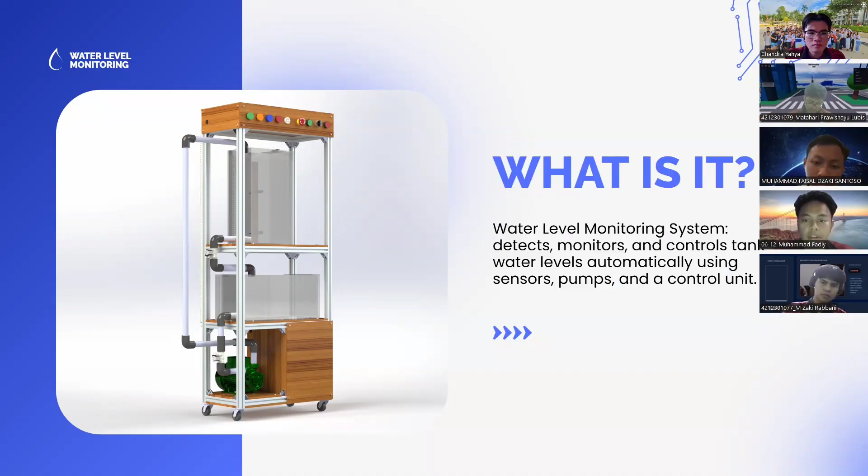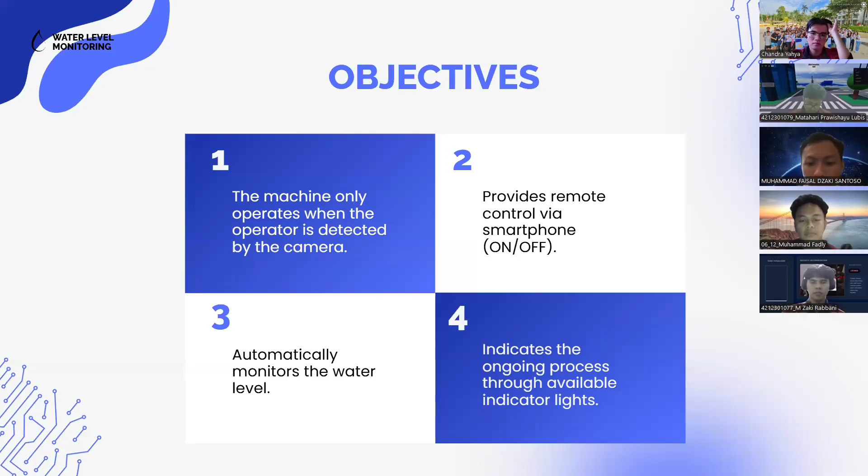Okay, what is it? Water level monitoring system functions to detect, monitor, and control tank water level automatically using sensor, pump, and a control unit. Objective: first, the machine only operates when the operator is detected by the camera. Second, provide remote control via smartphone, on or off. Third, automatically monitor the water level. Fourth, indicate the ongoing process through available indicators. Next.

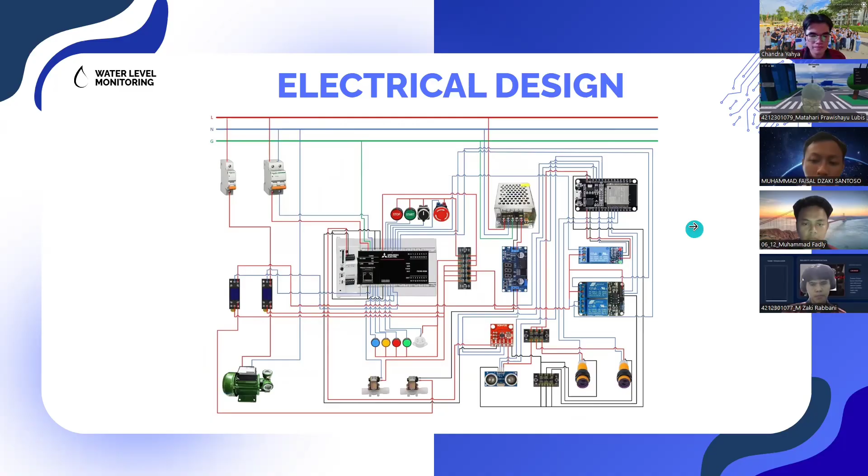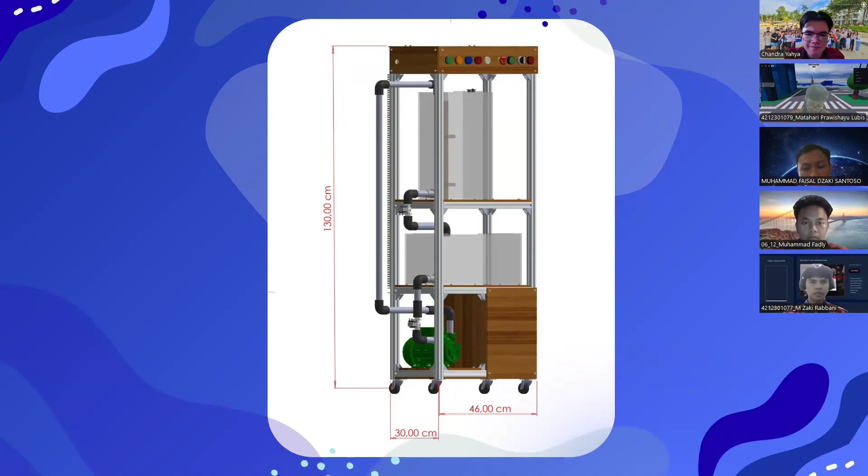So the machine is built from several main components. First, there are two water tanks placed at the upper and the middle part of the machine, and these tanks are used to store the water and observe the water level. There are also two solenoid valves installed on the pipes to control the water flow between tanks. And at the bottom part, there is a water pump. EFOS DB-125 is the type, and the water pump moves the water through the system and is placed at the bottom to help stable water flow.

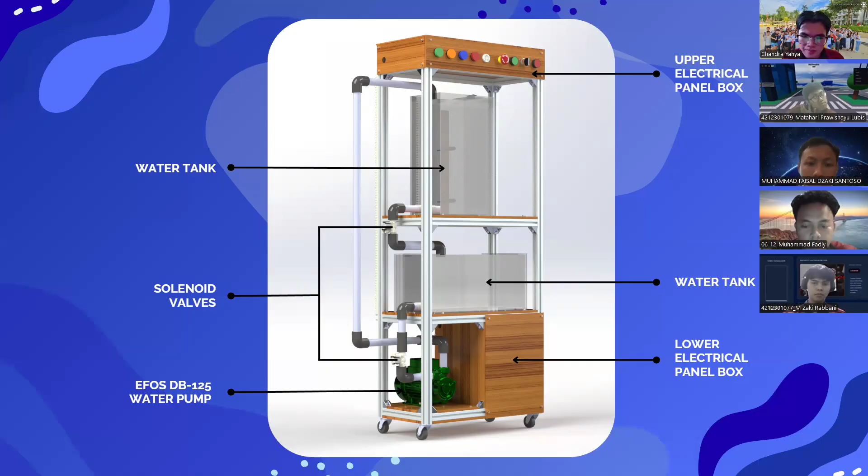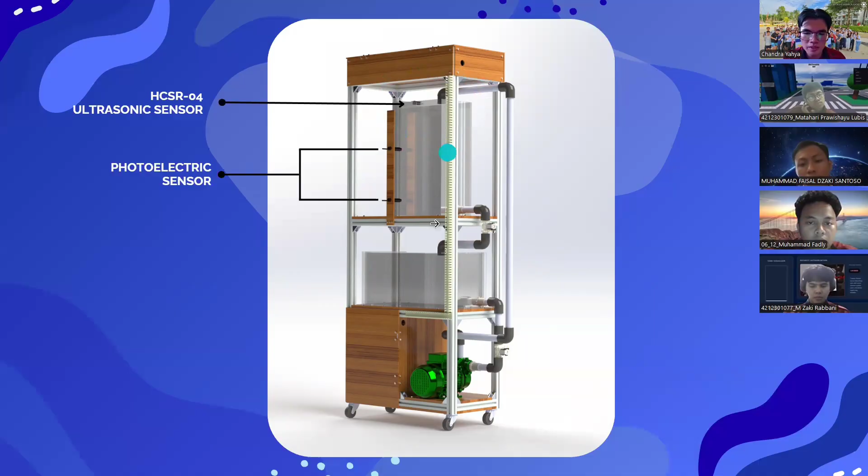The system also has two electrical panel boxes, at the top and at the bottom, and these boxes are used to protect the electrical components and keep them safe from the water. The system also includes two photoelectric sensors, which are used to detect water level positions, and one ultrasonic sensor. HCSR-04 is the type, which is used to measure the water distance or the water level inside the tank. Next.

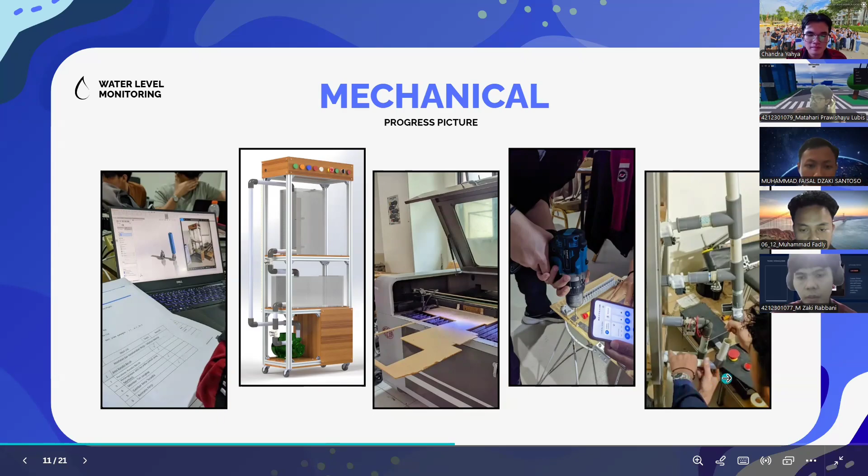And this is our progress picture. So first here is our mechanical progress picture. In the first photo, we're doing the mechanical design, and we design it using AutoCAD, and then we do the laser cutting for the panel, and after that we do the drilling for the panel, and then we're installing the pipe and installing the solenoid valve. Next.

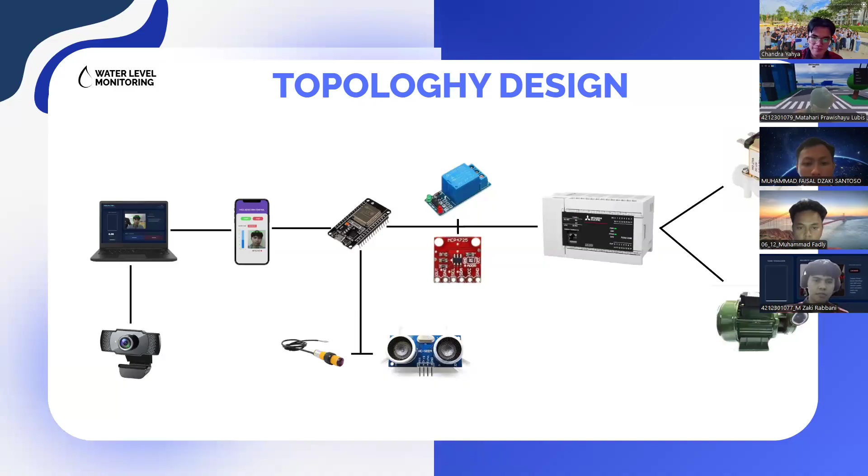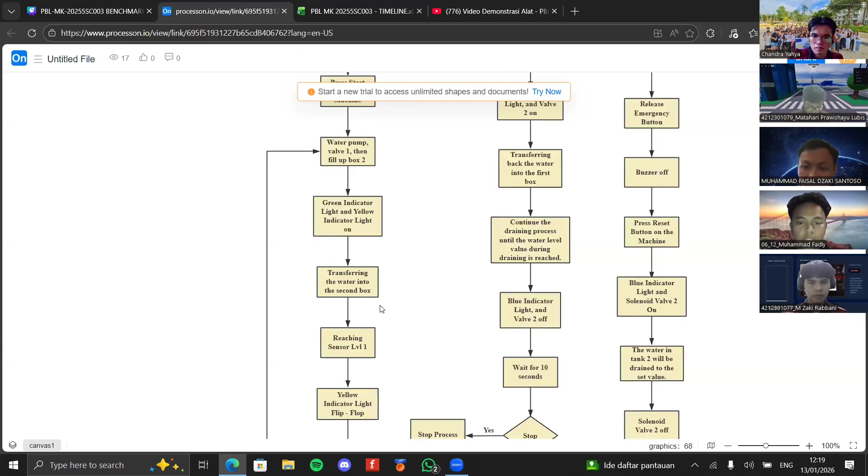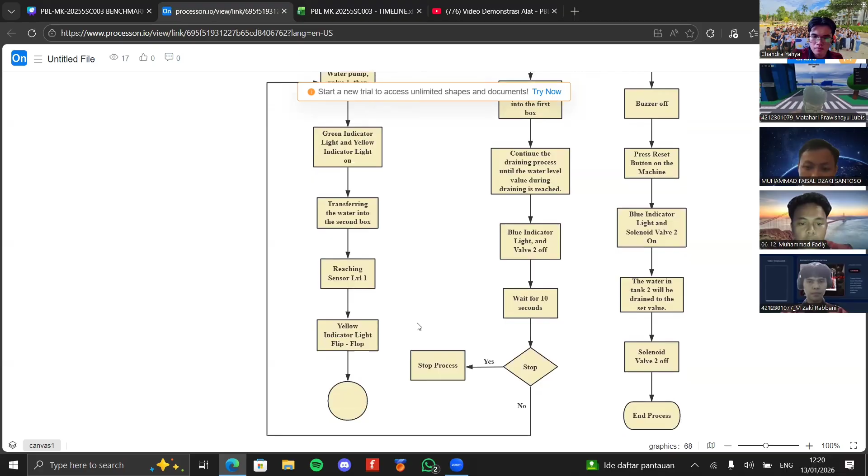Next is reaching sensor level 1. During water filling, the water volume will increase, and when sensor level 1 detects the water, the next process will begin. The next process is the yellow indicator light will flip-flop, which means that we must be careful because we have entered the medium level. After that, continue filling until sensor level 2 detects or until the water level value during filling is reached. Okay, so the purpose of this process is that the water filling will stop if sensor level 2 detects the water or if the water level during filling has reached the value we set at the beginning.

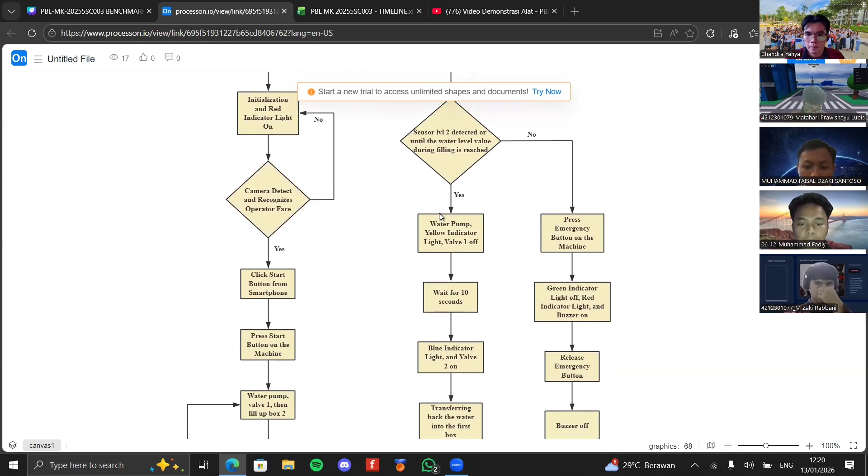After that, the water pump, yellow indicator light and solenoid valve 1 will be off. And after that, we can wait for 10 seconds to see and make sure whether the water level has reached the value we want earlier or not. After 10 seconds, the blue indicator light and solenoid valve 2 will be active. And after that, transferring back the water into the first box. And next, continue the draining process until the water level value during draining is reached.

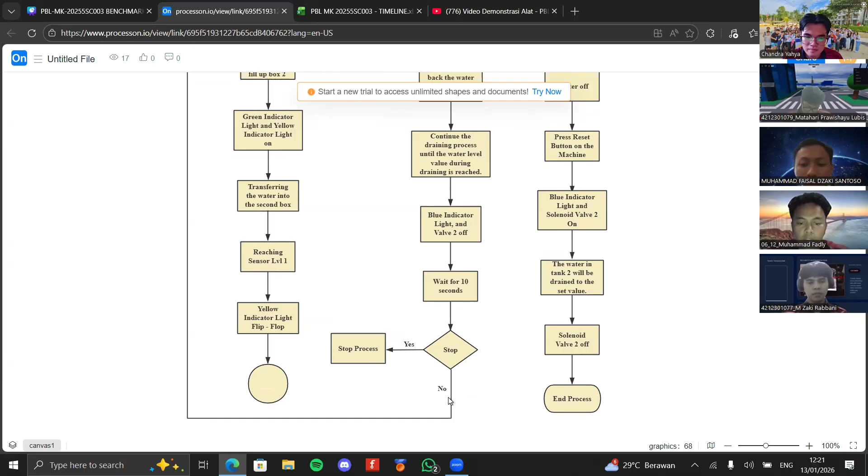Okay, after that the blue indicator light and solenoid valve 2 will be off, and we can wait for 10 seconds to see and make sure whether the water level has reached the value we set at the beginning. After that, we can press the stop button on the machine. If we press the stop button on the machine, the process will be stopped. And if we don't press the stop button on the machine, the process will continue and repeat back to the filling process like this.

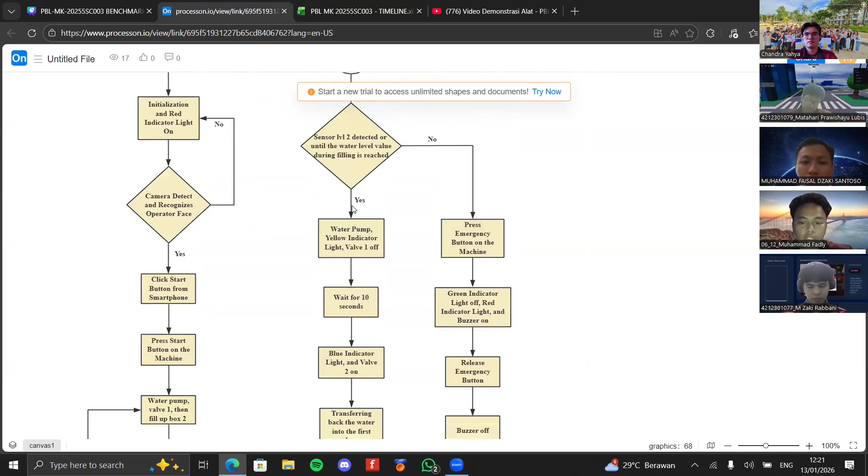And this is the condition that occurs if there is a problem. For example, a sensor that is damaged and cannot read the value. If the sensor cannot read the value, we need to press the emergency button on the machine. We don't need to press stop but press the emergency button on the machine. After that, the green indicator light will be turned off, and the red indicator light and the buzzer will be active. After that, we release the emergency button and the buzzer will be off.

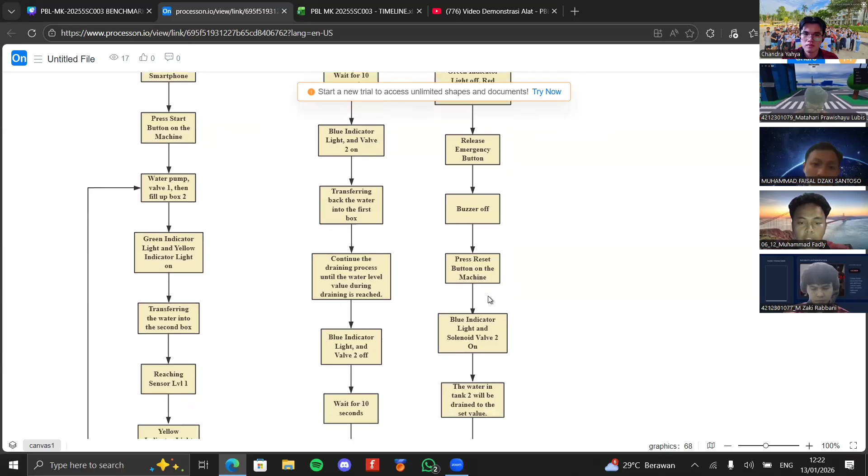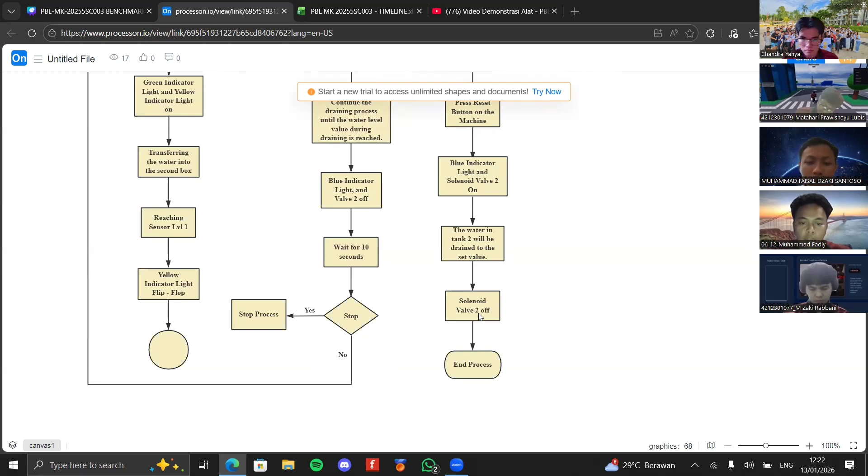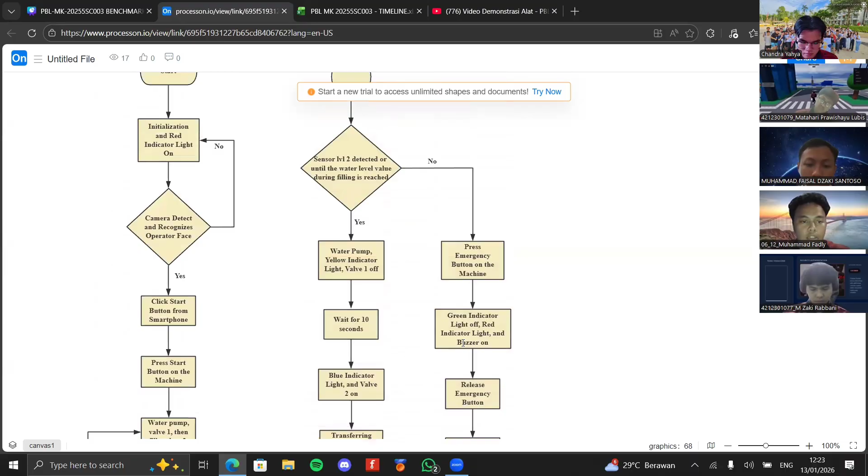We can press the reset button on the machine so the draining process will begin again. The blue indicator light and solenoid valve 2 will be active, and the water in the second box will be drained to the set value. After reaching the value we set, solenoid valve 2 will be off and the process will end. After that, if we turn on the machine again, we can go back to the first process. Okay, next is timeline.

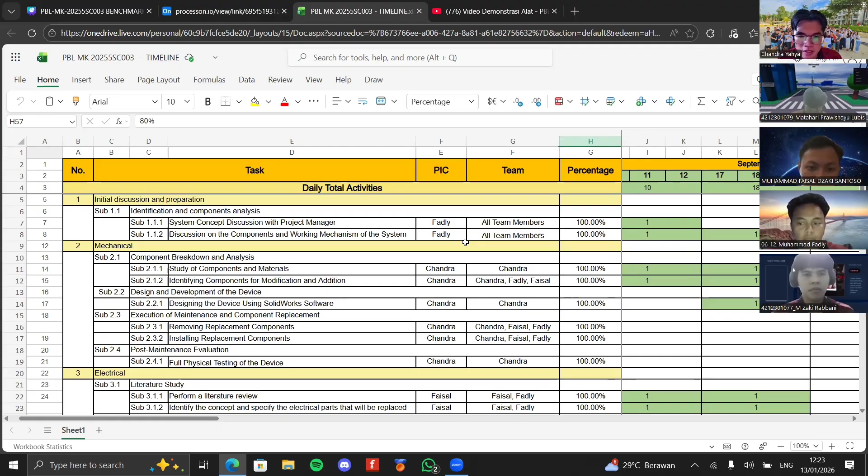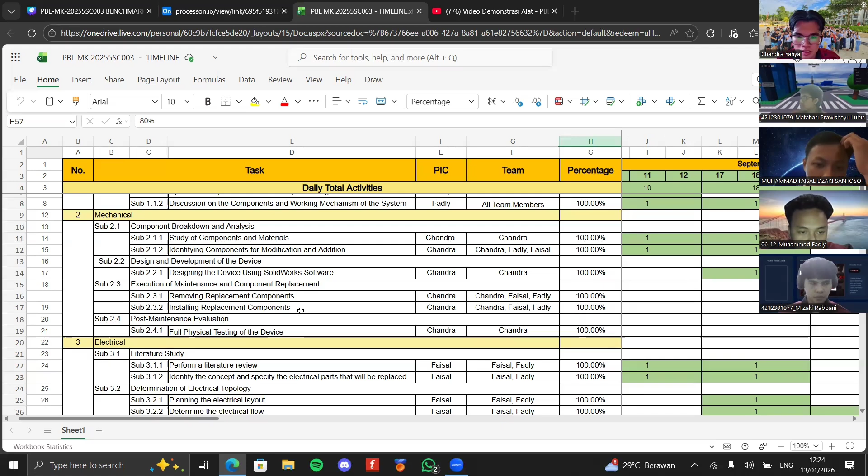The second stage is the mechanical design and development. This includes studying components and materials, designing the device using SolidWorks, replacing and installing the mechanical components, and performing the physical testing to ensure the mechanical system works properly. And this stage is also 100% completed.

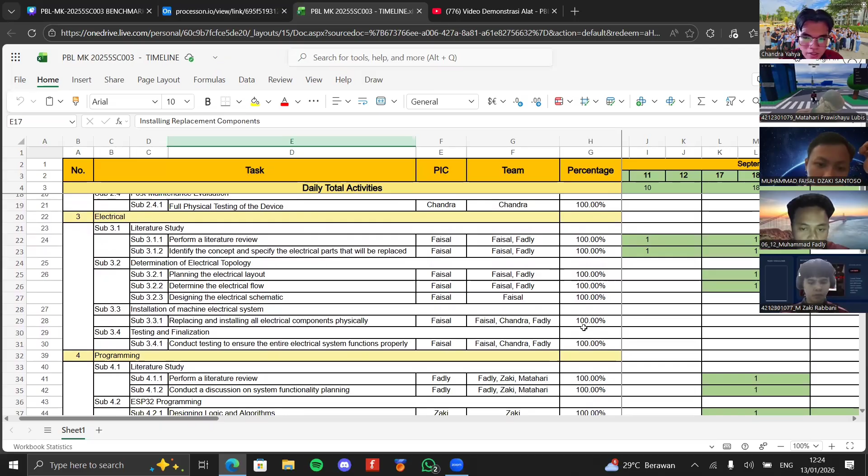Next is the electrical system development. The activities in this phase include the literature study, determining the electrical topology, designing the electrical schematic, installing the electrical components, and testing the electrical system. This stage is fully completed. The next stage is the programming. This phase involves the PLC programming, ESP32 programming, logic and algorithm, and the system testing to ensure proper operation.

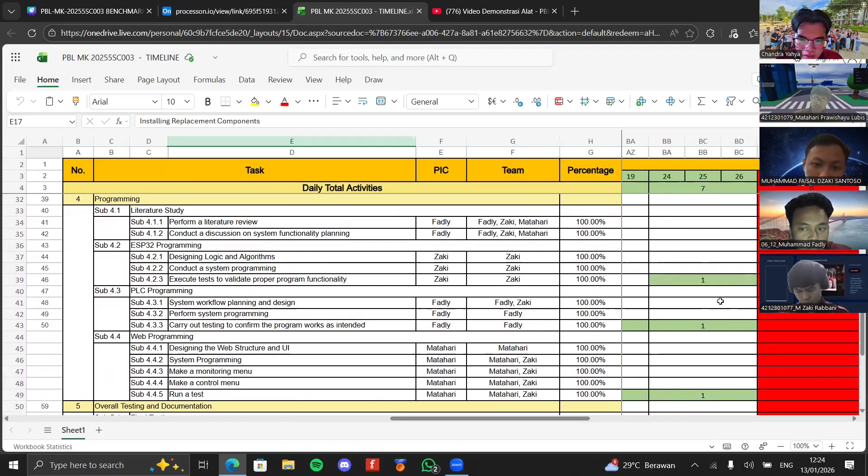And after that, the project also moved into web programming, where the team designed the web structure and the user interface, the UI, developed the monitoring and control menus, and tested the web-based design. These stages are also completed.

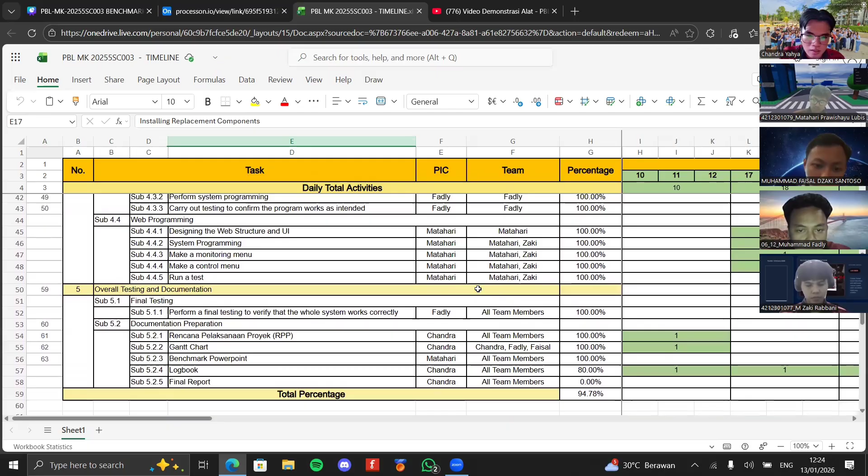The final stage is overall testing and documentation. In this phase, the entire system was tested together, the overall testing has been completed, and the system operates as expected. Currently, the only remaining work is the documentation stage, which includes final report preparation and logbook completion. These tasks are still in progress. Next,

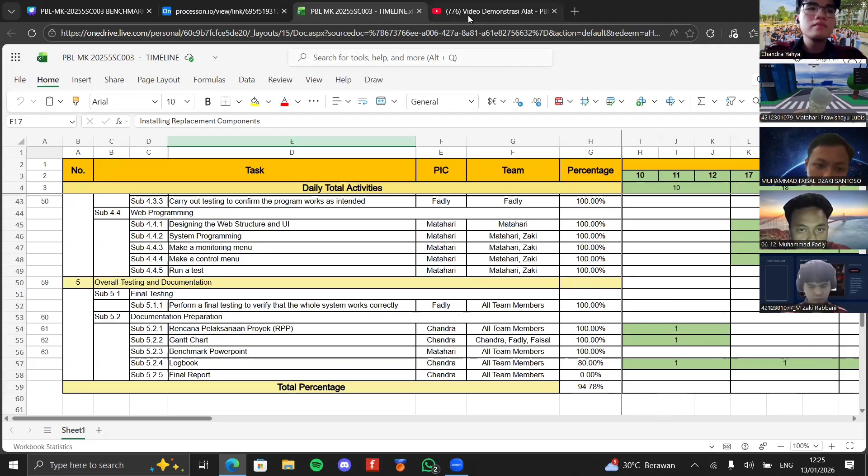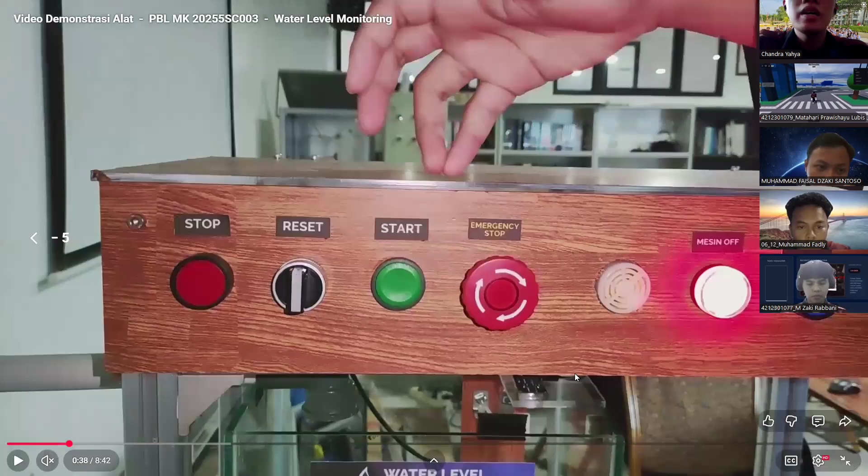Okay, the next process is a video demonstration. Okay, so this is our demonstration video. This is our final box. There are a few buttons and indicator lights. The first one is the stop button. There's also a reset button, the start button, emergency button, and in the middle there's a buzzer. And then there are the indicators.

For the indicator lights, the first one is the red light, which is turning on now, indicating that the machine is off. Then there's a blue light indicator, indicating the draining session. Then there's a yellow light indicator, indicating the filling session, and the green light indicating that the machine is on.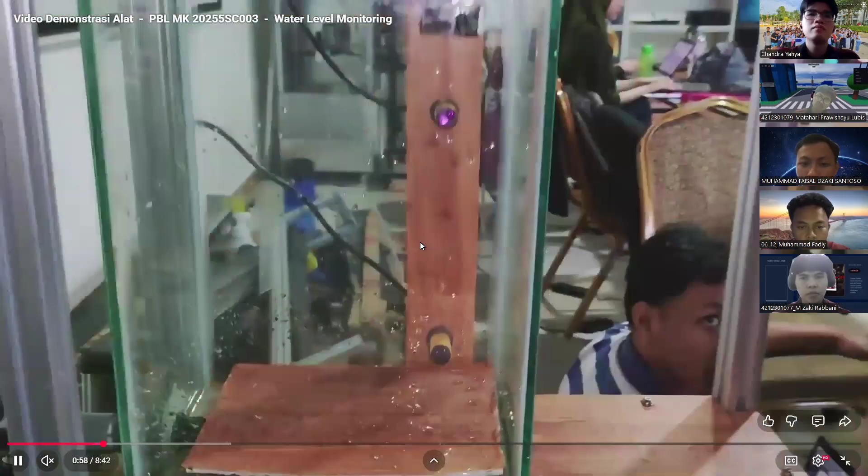Okay, in order to turn the machine on, you have to be detected first by the camera, and you can see here the Wi-Fi on the laptop is Redmi Note 8 Pro, and on the phone is Polytechnic DU Lantai 4, which is a different network.

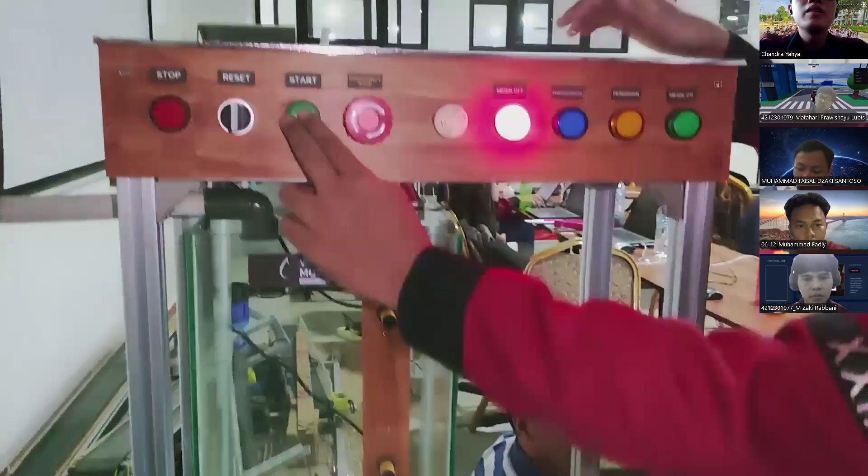Okay, we begin by pressing the start button. Okay, the two indicator lights are on, the filling one and the machine on. Okay, the system starts filling.

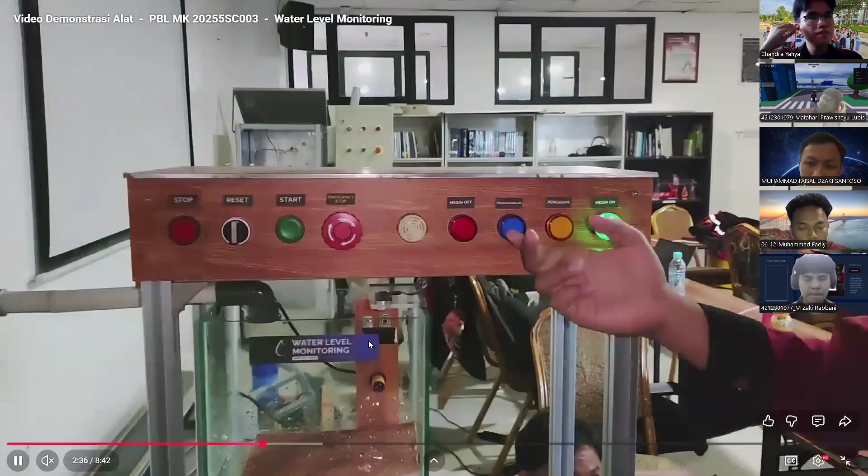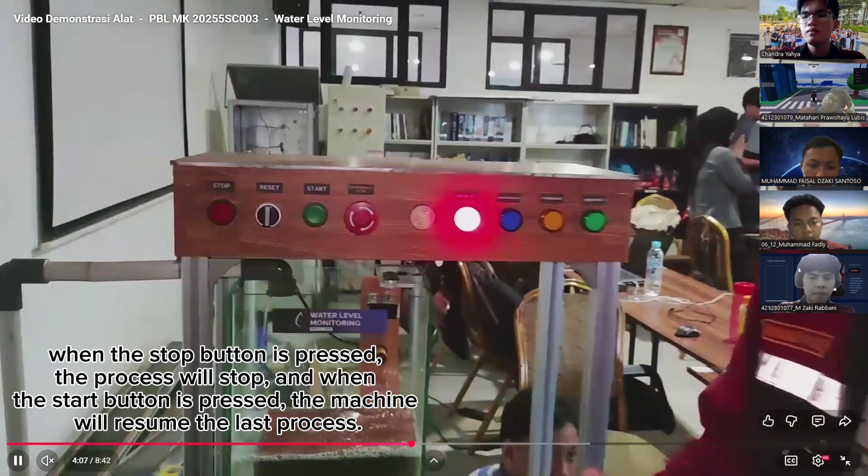Okay, next is the project result. We have completed: first, mechanical design; second, electrical design; third, PLC programming; fourth, operator detecting and recognizing; fifth, web GUI programming and integration with PLC and ESP; and the last is electrical assembly with standard installation. Okay, next.

So there are a few obstacles we faced during this project. First is leakage on the water tank and pipe joints. Second, the HC-SR04 ultrasonic sensor can't be directly connected to the PLC ADC pin. Third is the lack of precision or accuracy in the facial recognition system. And the last is water splash resulting in inaccurate ultrasonic sensor measurement. Okay, next.

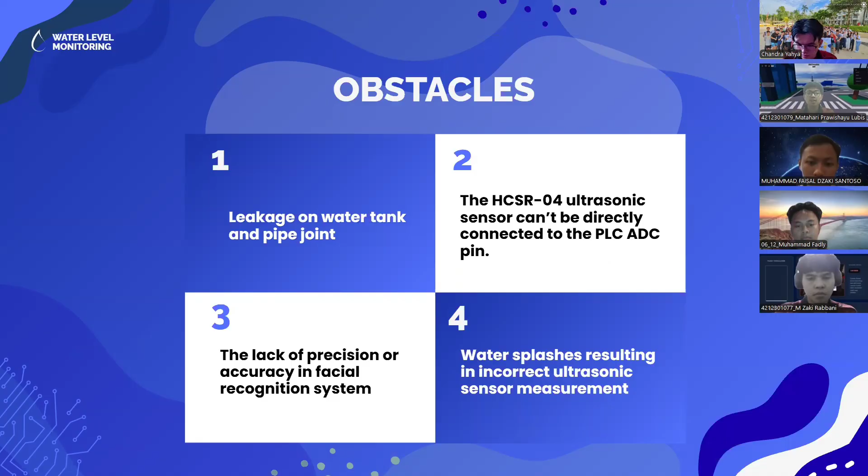Okay, so there's a few knowledge we gained from this project. First is operator detection, which included the detection and recognition system using Python programming. Second is electrical and PLC installation, which includes installation according to standard. And the third is control logic and automatic sequencing, including PLC programming and how it works.

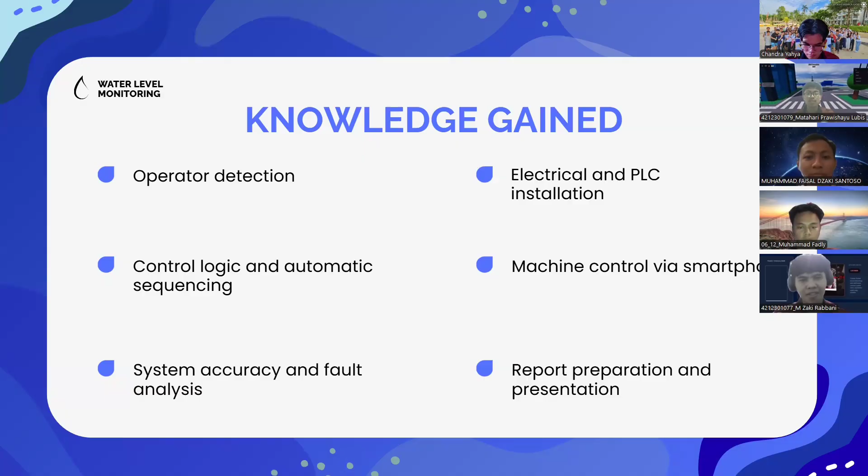The fourth is machine control via smartphone, which included the web programming. The fifth is system accuracy and fault analysis. And the last is report preparation and presentation. Okay. This is the explanation that we have conveyed.